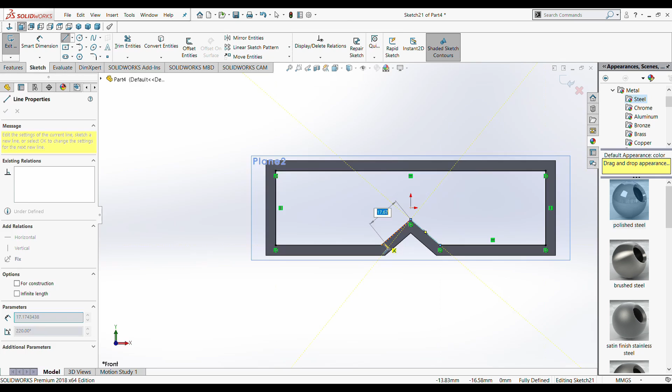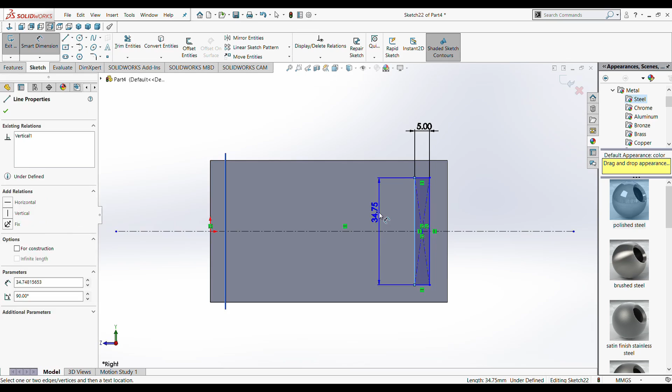Then we create a new plane at the center of the front face of the frame. Next, we draw a line following the line of the hole. After that, we use 3D sketch to draw a rectangular shape. Then we use a cut sweep to make a groove to place the glass. Next, we make a hole about 5 times 20mm at the side of the frame and extrude cut until the other side of the frame. After that, we make a fillet of about 5mm or 2mm at every sharp corner to prevent possible defects during the manufacturing process of this frame.

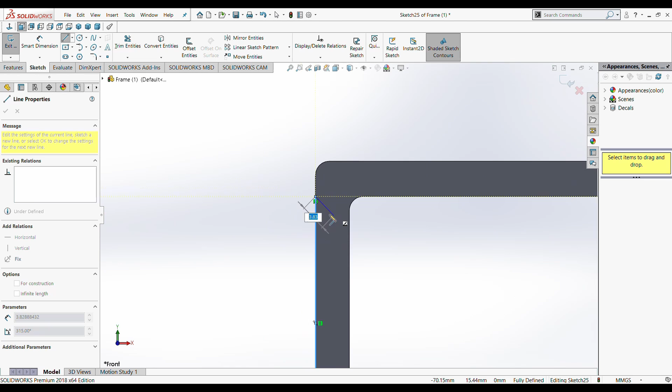Lastly, we make a groove to slide the thermal camera at the side of the frame.

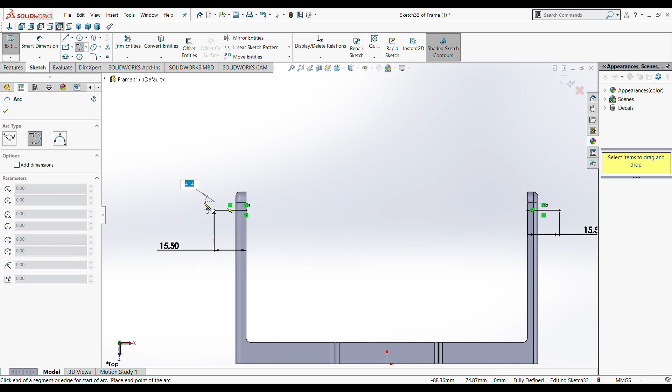The next part is drawing a strap from the frame. We just need to draw a curved shape. Then we use the sweep boss according to the line. Then we change the material of the strap to rubber.

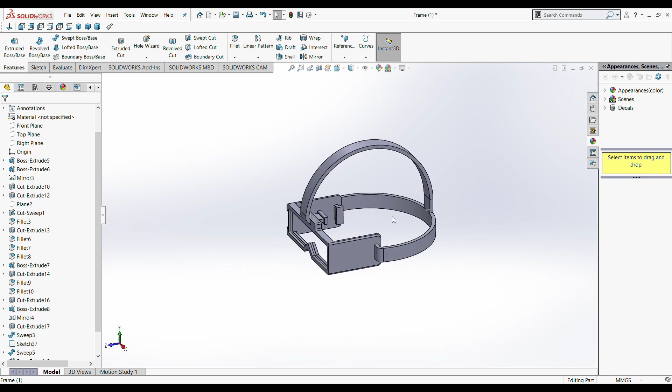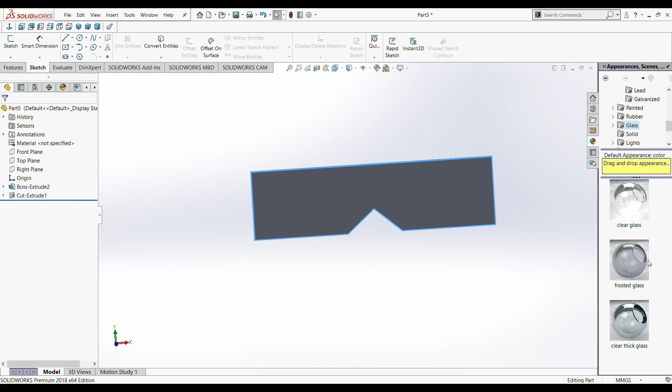Next is drawing the glass. The dimension of the glass should follow the dimension of the hole on the frame. Then the part is changed into a glass material. We should make a groove to place the display camera on the frame of the glass.

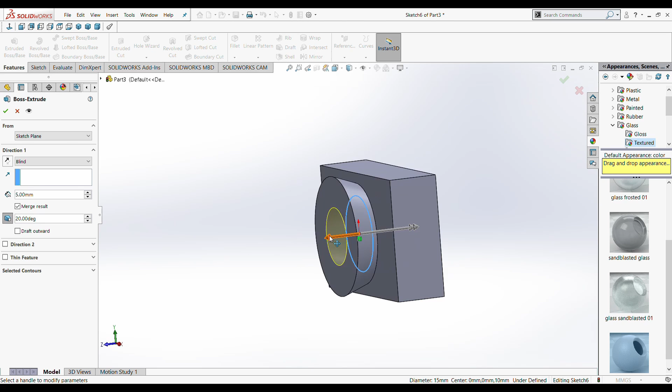Then the thermal display. Just draw a rectangular shape with the same dimension as the groove on the glass and extrude it by 10mm. After that, draw a circular shape at the front face of the part and extrude outward with 20 degrees. Create one more smaller circular shape, extrude about 3mm with 20 degrees and change the material into glass. Finally, change the bigger circular extruded shape into rubber. This is for the thermal camera. The method of drawing the thermal camera is a bit the same as the thermal display.

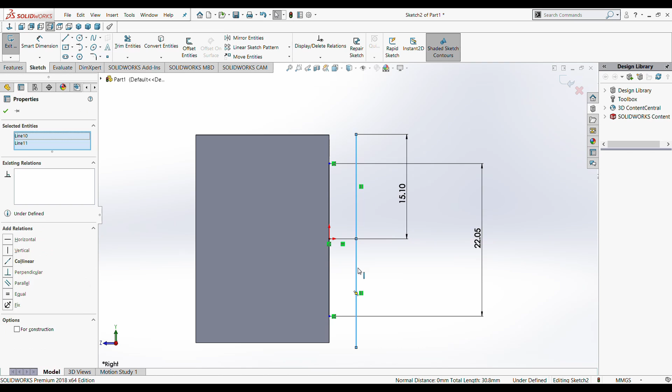The last part is the battery case. The method is just using an extrude boss and shelling the part. Create an offset line and use extrude cut. Then we draw the terminal for the battery.

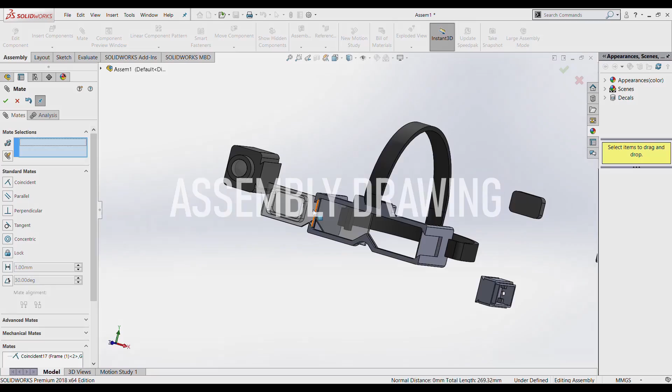For the assembly method, just insert all the parts, then select advanced mates, select width, and choose tab selection and width selection so the part will be placed at the center of the other parts.

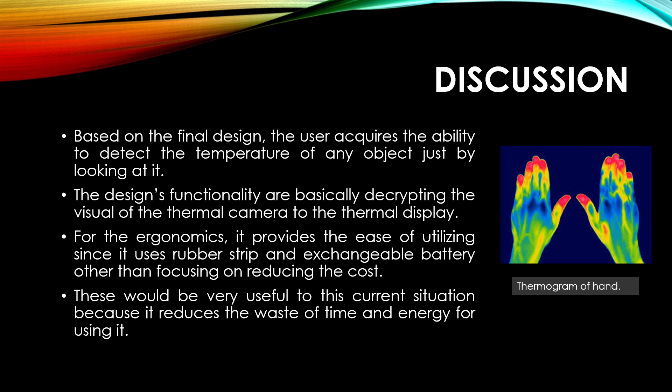Discussion. Based on the final design, the user acquires the ability to detect the temperature of any object just by looking at it. The design functionality is basically transmitting the visual of the thermal camera to the thermal display. For ergonomics, it provides ease of use since it uses a rubber strip and exchangeable battery, other than focusing on reducing the cost. This would be very useful in the current situation because it reduces the waste of time and energy in using it.

In conclusion, we are able to know more about SolidWorks software, learning the inside out of how to use SolidWorks software, and able to design a thermal headgear model using SolidWorks software, hoping our design will help frontliners detect the body temperature of people in larger crowds.